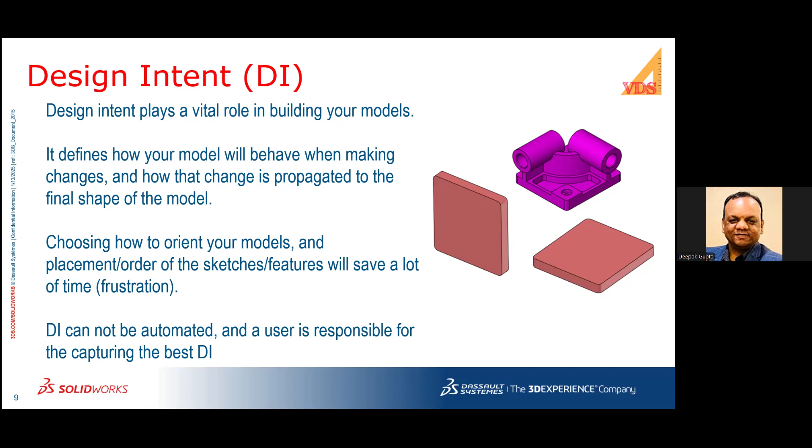And the most important part is that design intent cannot be automated, and a user needs to capture the best design intent based on what he or she is going to model, or what the question is asking them to model.

Okay, now we are going into the exam topics.

The first topic is global variables and equations. Global variables or equations will be the main ingredient when you want to do segment one. The best part about global variables or equations is that you can create the global variables on the fly or using the equation editor.

So let's look at how we can create the global variables on the fly, or how we can use the equation editor. We'll look at one example of each.

Is the SolidWorks screen visible? Yes sir, yes sir, visible.

Okay great. So in the exam, you will be asked to create certain global variables and link your dimensions to those global variables. And then throughout that particular segment, you will be asked to change the values of those global variables so that your model is going to change.

And then you will be asked to get the mass properties, or pick one of the values from the mass property. So I've created this base plate and double clicked on it so that I can see the dimensions. Right now you can see there's nothing assigned to these equations.

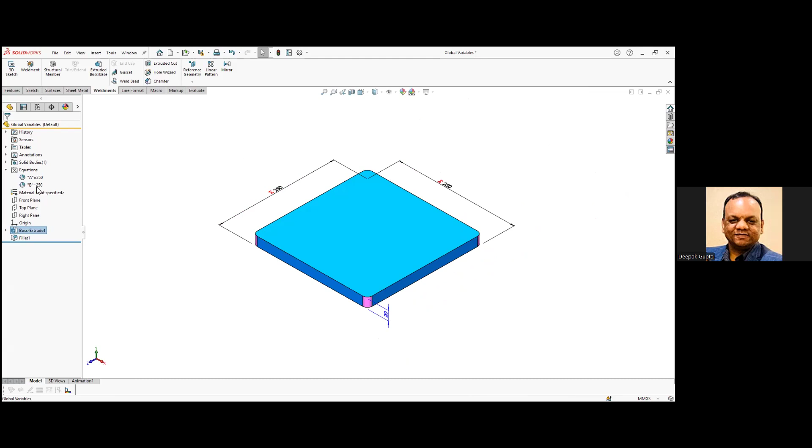So for that, you have to always go over here and change it from here. Good to see that it's letting me change it. So I'll save and close this file.

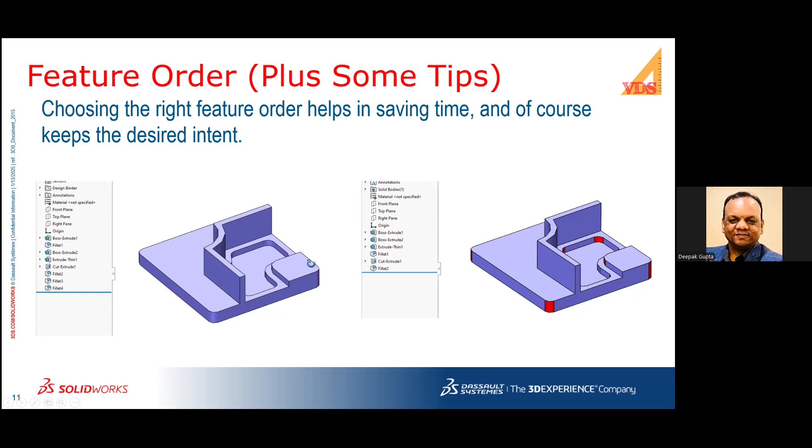Let's look at this file first. So what the user did: created a base file, then added some fillets on the end, then did some extrude and a cut extrude, right? And then the user added the other fillets, which you can see over here. Now, what if this fillet changes?

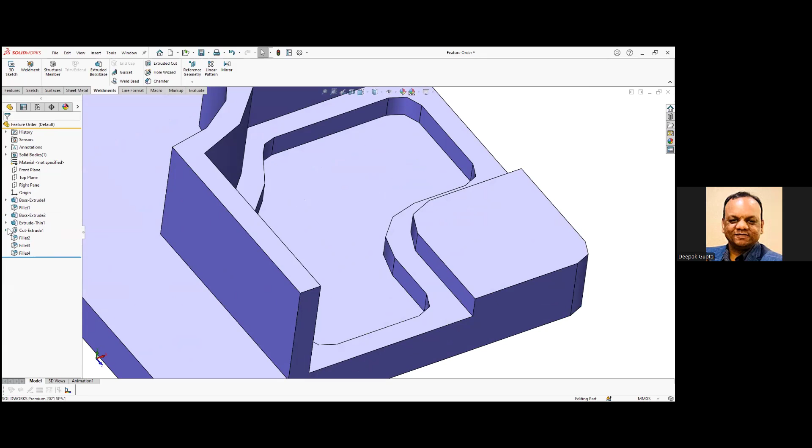Let's look at how this cut extrude has been done. So it's basically an offset from this face, which means whatever fillet will be there, this fillet will be 10 plus whatever is the offset value of that fillet.

But instead of using that design intent, the user created this fillet as a separate tool and separate feature, and this fillet as a separate feature. So if we change it to 12, but because the design intent was not used correctly, this fillet instead of being like 25, it should have been whatever is the offset value.

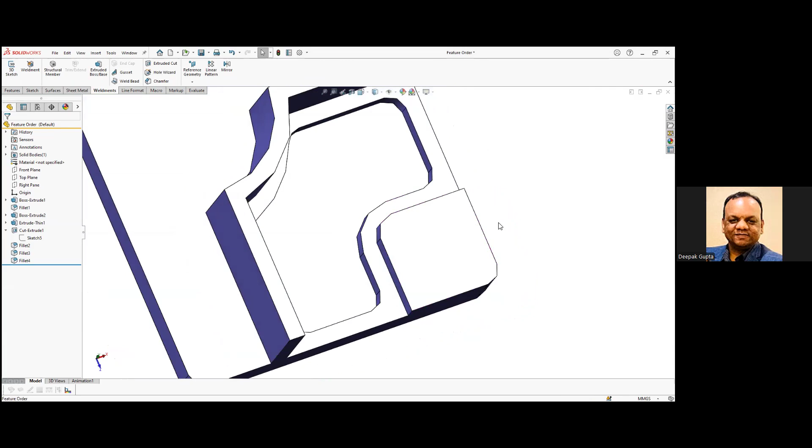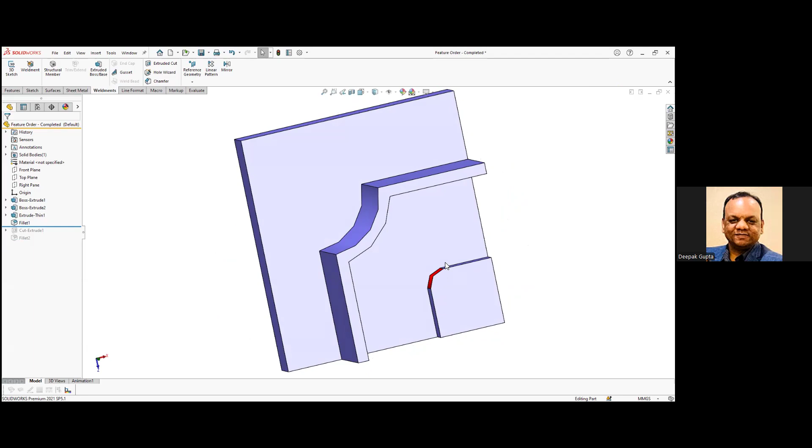Now let's look at the other user's file. What he did was create the same thing like this, and then he knew, because there is a cutout to be made, that cutout is an offset from these edges and this fillet feature as well. So he considered that into the design intent, and this offset was created using that feature in mind.

And if I change this offset to say 15, this fillet will automatically update. And finally, he added the rest of the fillets.

Now I would like to show you a few tips and tricks over here. Let me just roll it up. So we have seen that there was an extrude feature created in this corner. Let's create one more. I'm using the shortcut L for the line key, right? So I'm doing an L, and then I will go to the extrude.

I will not. Oh, right. Hmm.

No, SOLIDWORKS is behaving like this. What happens is when you create a sketch like this - or maybe I should be in sketch mode, sorry, I should be in the sketching mode. So I drew this, and I went to the extrude command. The moment you do this, I'm not sure why it is not running.

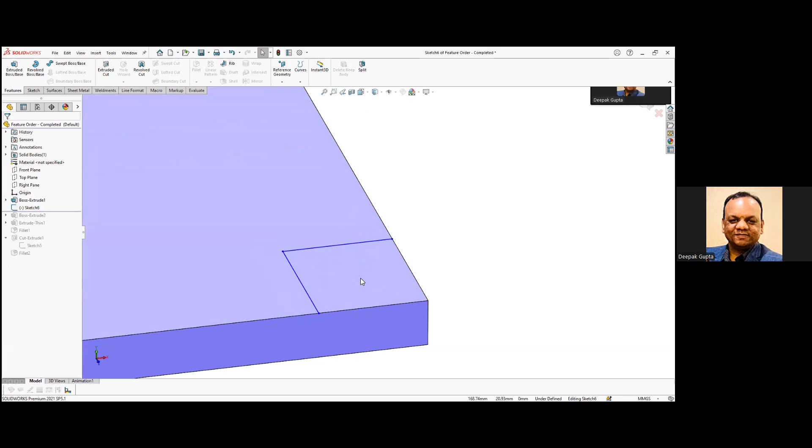Or maybe we can try to give a dimension if that works. Let's try again - no, it's not helping. Sorry, for some reason it's not working, but you can try it on your machine.

What SOLIDWORKS will do is, when you have an open sketch which is coincident with the edges, SOLIDWORKS will prompt you asking should I close the sketch or not. Let me try one more time - no, it's not working. So okay, let's move on to this one then.

The second tip - I will delete this. One of the things I have seen users doing is, when they have to do an offset on a face, what they will do is select all the edges individually. Instead of that, what you can do is simply click on the face.

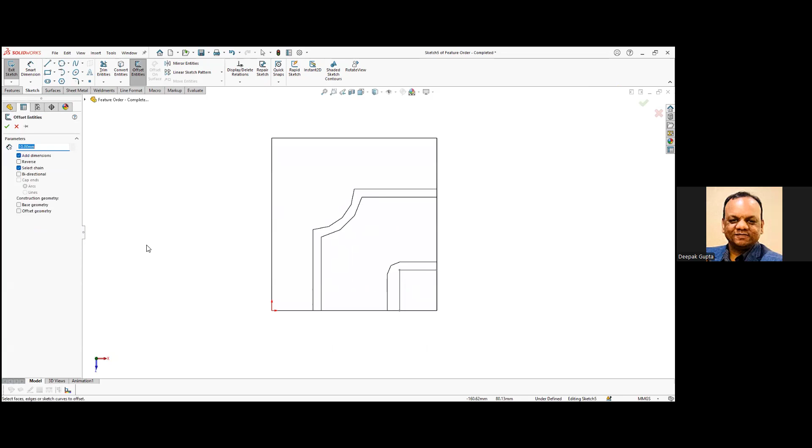SOLIDWORKS will then automatically find all the required edges, and then either you can click inside to get the offset, or you can select the direction from here. So instead of selecting all single edges individually, you can simply click on the face, and that will let SOLIDWORKS find all the required edges on that face.

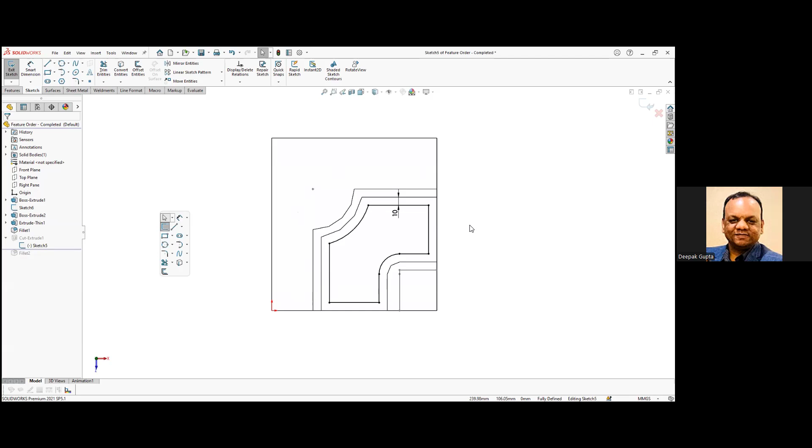And then if you have to do a fillet on several corners - usually I don't recommend sketch fillets, but sometimes you have to use them. So if you have a lot of corners or vertices where you want to add a fillet, just go to the fillet command, enter your fillet value, let's say 5, then cross window like this, and enter.

So instead of individually picking up each corner, you can select all the vertices, or even if you do Control A, it will automatically select all the vertices and add all the desired fillets. So these were two or three tips. This also works - I'm not sure why it is not working here. Let me just try one more time by deleting all of it.

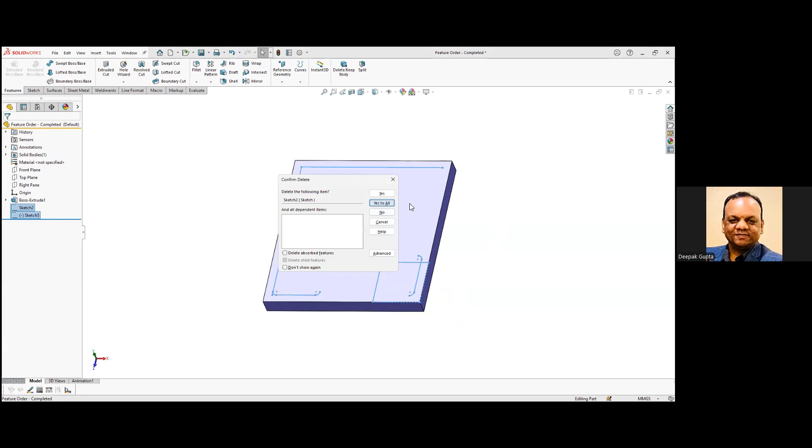Let me just delete all of these sketches and try one more time. So a line, and when I go to the extrude, for some reason it is not working. No, sorry, it's not working. So I would suggest you please try it out yourself.

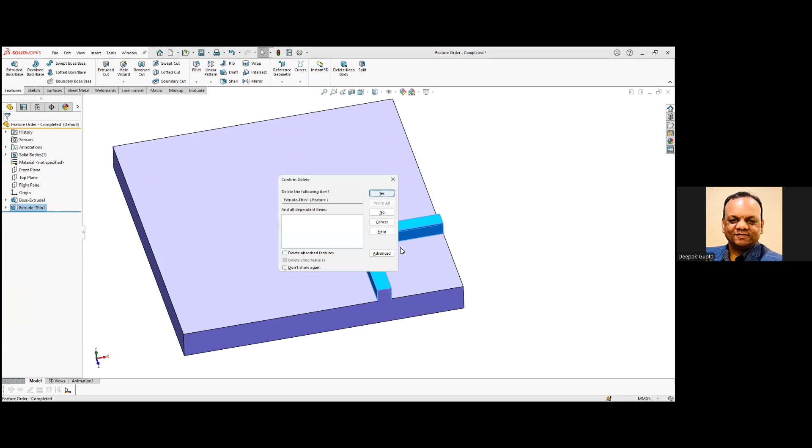When you have a sketch like this, an open sketch, and you try to extrude it, SOLIDWORKS will prompt you if you want the sketch to be closed, or converted into what you'd call a thin feature.

Okay, another fun quiz. So anybody wants to answer, maybe in the chat.

Cheeseburger - yes, cheeseburger, that's correct. Prabhu, you've sent me a message: can we flip the direction? Yes, we can flip the direction, but for some reason I'm not sure why SOLIDWORKS is not prompting to show the direction. I'll try to find it out at the end of the session why it is not working, and then we'll definitely figure out why it was not working.

Okay, offset from surface. Many people - this is specifically regarding one of the questions in the sample exam, but I'm sure it will come up in your daily life as well, or in the actual exam. In the sample exam, you are given a thickness of 5 millimeter for that cut extrude, which is from the bottom face.

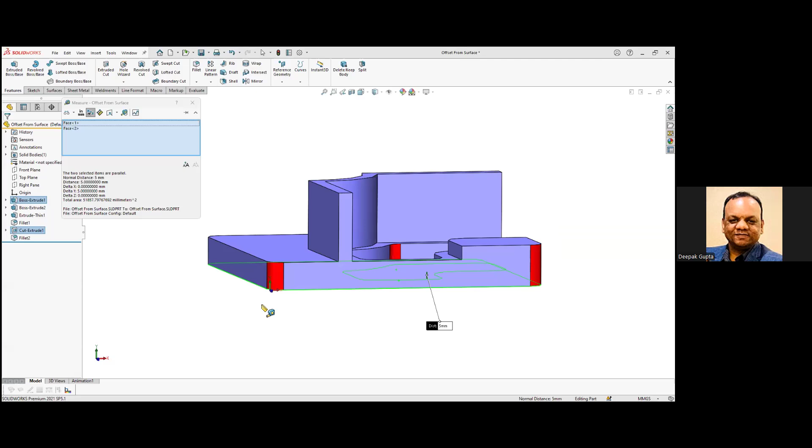This is what they will do - every time there is a change in height, let's increase the height, let's say make it 25. Once you do that, this will get changed, and the user will forget that they did the calculation in a different way, and now they need to increase or decrease the depth of this cut extrude to get the right answer.

Instead of doing that, when you are doing the cut extrude or even boss extrude, instead of using blind, simply use offset from surface, define your offset face, and define the thickness you need. Whatever thickness change you make - so this is now 5 mil, right? And now let's change it back to 20, and let's check this thickness again.

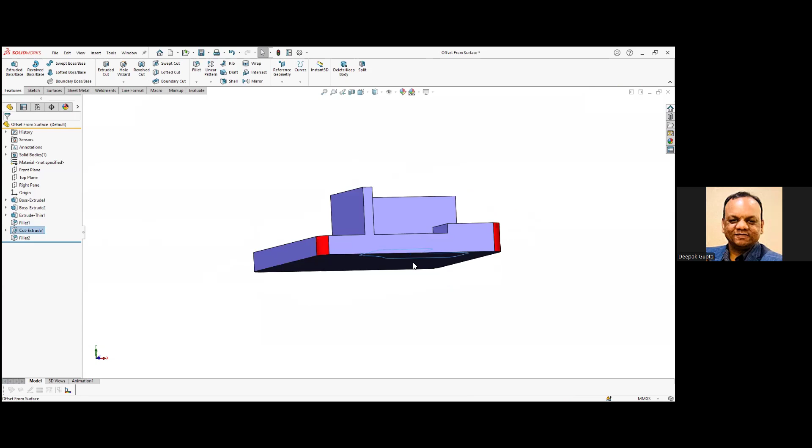So this is again 5 millimeter. You have to make sure that you use the right tool to keep your design intent intact and capture it correctly.

I have seen, like from the last couple of years, that users have messed up some of their questions because they didn't use the right unit, decimal places, or even the material. So you need to make sure that you are reading the questions carefully, because in some of the questions they might change the units, the decimal places, or even the material as well.

Mohammed has sent yes, or maybe I might have this option closed. Yes, Mohammed, this is the right command, or this is the correct prompt. So everyone, I would suggest you look at what Mohammed shared in the chat, where he is showing the option I was talking about.

So when you do a sketch which is coinciding with the edges, you will get a prompt. Maybe I have that prompt off due to some options. So getting back onto the unit, decimals, and materials - make sure that you read the questions carefully. What is the unit system being asked? What are the decimal places? What is the material? And you have to use them effectively to get the right answer. Otherwise you will be wondering why your answer is not matching with one of the options given, or why your question was wrong.

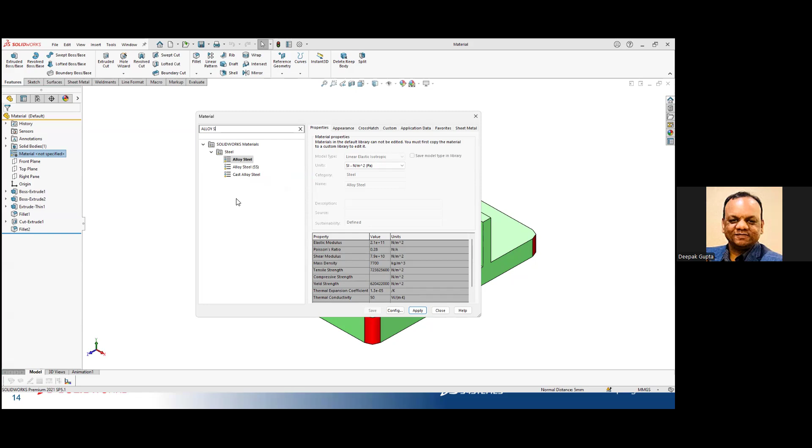So the exam had alloy steel - now with the alloy steel name we have three variants. We have to make sure that we are using the correct density of the material which is given, otherwise your answer may not be correct. Once you have selected the material, you can simply click on apply, and the material will be applied, and you will get the right answer. So use the search for material, and make sure you verify the density given in the exam.

Mass properties - during segment 1, and I think during the other segments also, you will be required to check the mass properties. In the mass properties, you might have to enter center of mass, or maybe the weight or mass of the model. SOLIDWORKS provides you a tool called mass properties itself, where you get all the information you need to answer those questions, or even these are helpful in your daily needs.

As a tip, I would suggest you to assign a keyboard shortcut to both measure and mass properties, so that it makes it easier for you during the exam, and you are not spending time trying to find out where the mass property tool is. So for me, I have assigned M for the measure tool and W as a significance of weight for the mass properties.

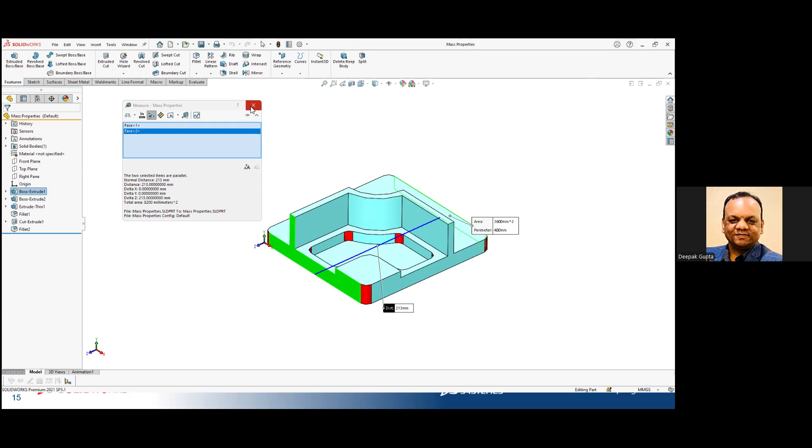So if I press M on my keyboard, I will get the measure tool, and you are seeing this name as mass property because that is the model name, but it will always show your model name over here. That can help you if you want to check something during the exam to make sure that your dimensions are matching. Now I'm pressing W on my keyboard, which gives me the mass property window. Make sure to assign any keyboard shortcut which you feel would be better for you. There is no hard and fast rule that you should use M and W - you can assign any keyboard shortcut to your needs.

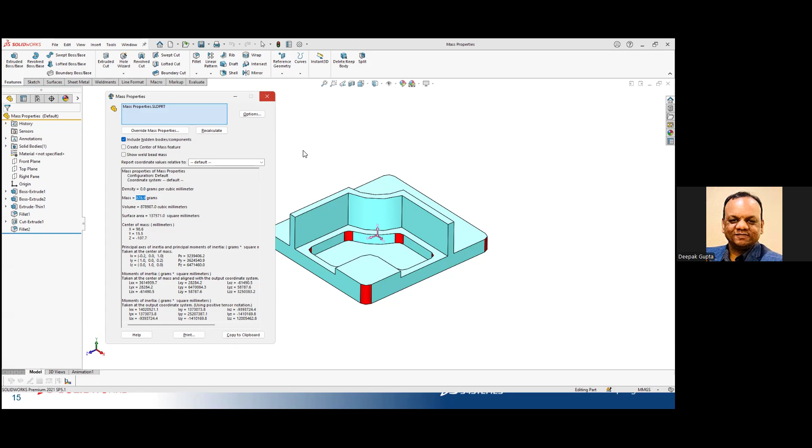And then you will be required to answer the questions, and you can also copy paste. I'll be talking about this again later, but what you can do is always collect the required value, if it is mass properties or the mass of the component, and copy and paste it into the exam. Make sure that when you are giving the answer where you have to enter it, no units are entered into that text box or the answer box, otherwise that answer will get invalidated. So make sure you need to enter only the numericals, and no other annotation or alphabet should be entered into the exam answer box.

Delete face. I would not suggest you use this particular command every time you are in trouble, but this tool will be helpful when you are in ultra trouble, I would say.

During one of the exam questions, you will be given a part, or you will be modeling a part where you will have to modify some things. For example, we have this part with an extrude boss feature on both sides, and the exam may require you to remove it from just one side while keeping the design intent intact.

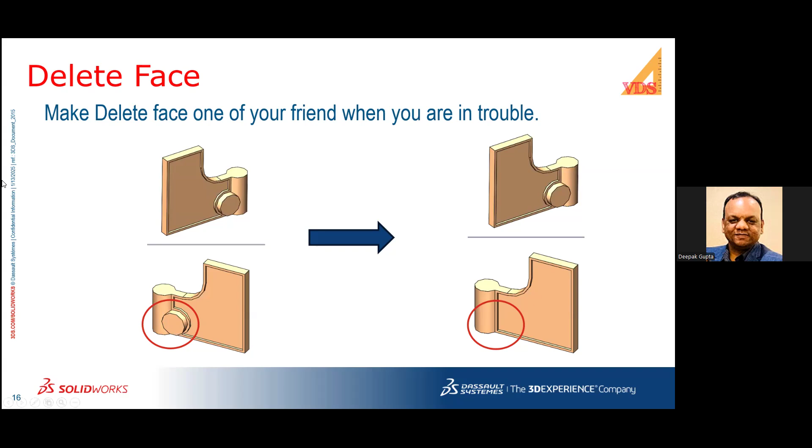Now, the first thing a user will do is edit the feature, remove it from the other side, and then edit this cutout to get to the right answer. But it may not be possible if you are given a part which has an imported body and no history. So this tool, delete face, will be helpful when you want to do it very quickly.

So this is the original file, and you will be required to create something like this and then verify its mass property. Let's see how we can use delete face.

You will find delete face under insert, face, delete face. You can select delete and patch, and not this one.

So did we see the magic? SOLIDWORKS automatically computed the rest of the thing.

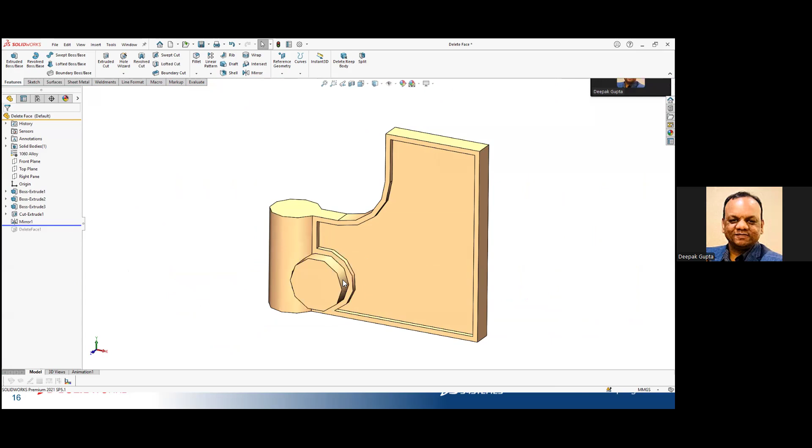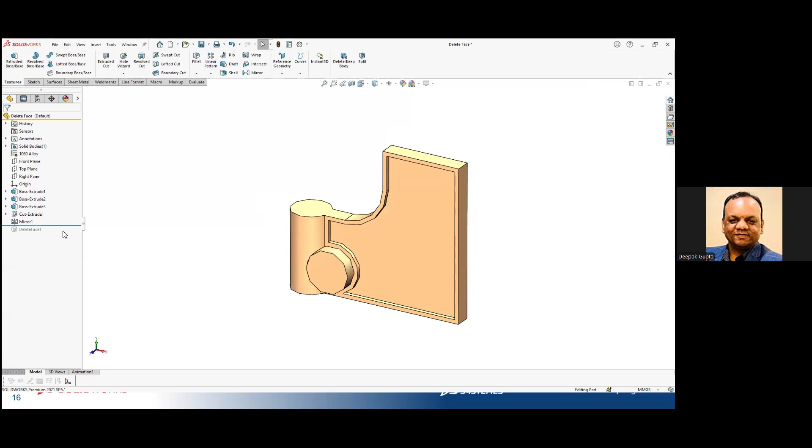Now, if we had to do it the other way, which means you would have to maybe cut extrude this, do a boss revolve or boss extrude for this, and then do a cut extrude to remove all of it, which could have taken a lot of time, and there is a good chance our model may not be correct. So instead, try delete face first, and if that is not helping, then you can look for different methods.

And this is how you get this easily. It didn't take much time, no additional computing was required, and we still kept our design intent because we did not change any values. We just removed the unwanted feature as per the question.

Similar to delete face, we have another friend. Move face is also a friend in need.

Whenever you are in trouble, go to the move face and request it to help you get out of trouble. In one of the questions, you may be required to move a certain hole, or certain face, or certain features. So from this, you may be required to do it like this.

Now, there is a good chance that no feature history is given, or even if feature history is given, there is some design intent that this hole or particular feature is on a center line, meaning no dimensions are given, yet they require you to move it by a certain amount.

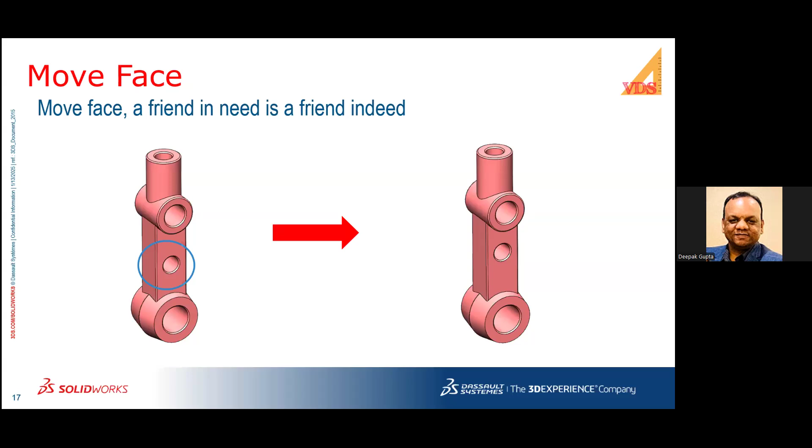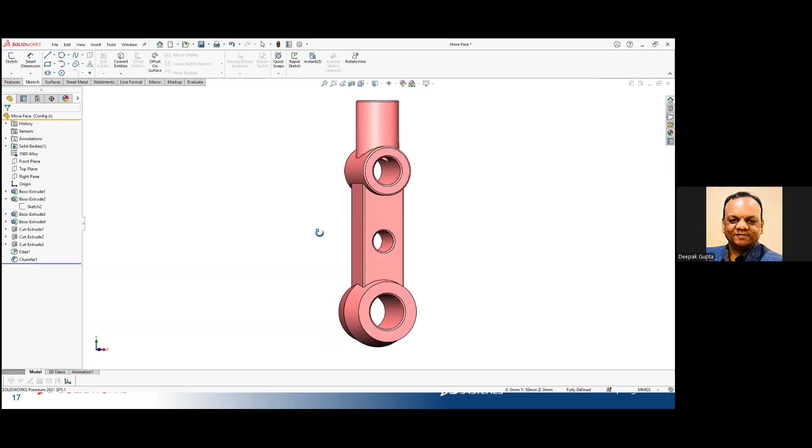So let's see. This is the feature, and if I look at this particular hole, it is on the center line. So if I have to work it out, I'll have to edit this feature, move it up and down as needed, add the required dimensions, and then again work on the chamfer.

Instead of this, we can go to insert, face, move face, and select these three faces. We'll say translate, and let's say we want to move it upwards in the y direction by 10 millimeters.

So we did not change anything. We did not go into the feature editing mode.

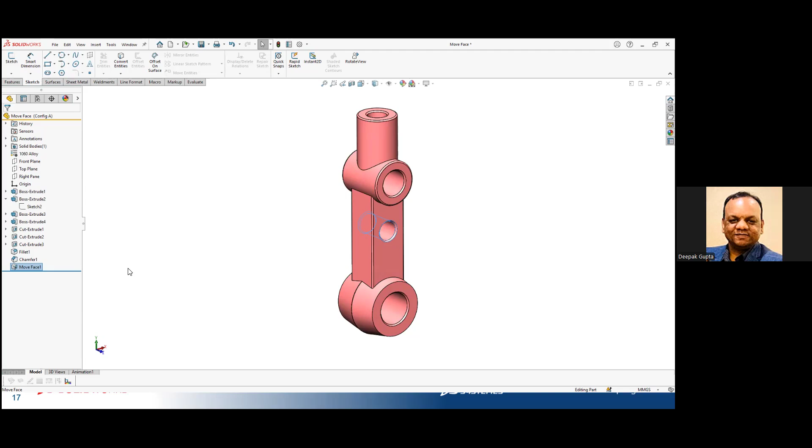Advanced shell - how many of you have used shell commands, or know what the shell command is? Yes, I have used it.

In the SolidWorks shell command, we can hollow out a part or model from the inside, and we can also remove any particular face we want. It adds the given thickness value to the rest of the faces. But in one of the questions, you will be asked to do a more advanced shell, meaning multiple thicknesses in a single feature.

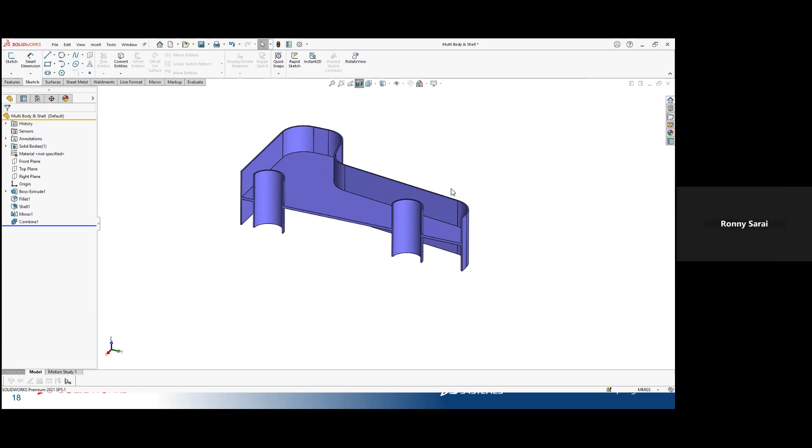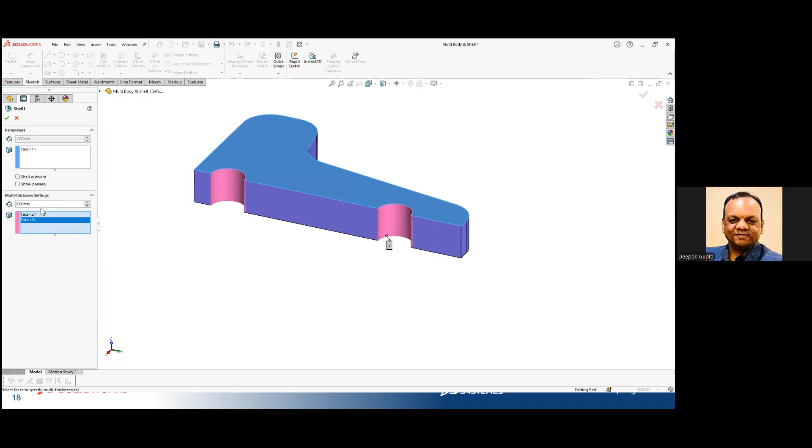You will be given a certain model, and you will be required to change from a continuous thickness to a different thickness. What you need to do is simply edit the shell command. On the upper side, whatever face you select will get this thickness, but on the lower side, you can define multiple thicknesses for different faces. For example, this face 2mm, this face 3mm, and this face 5mm. So we have four different thicknesses in the same model using one feature.

The moment you click OK, the overall thickness is 1mm, this is a 2mm thickness, this is a 3mm thickness, and this is a 5mm thickness. So instead of doing different workarounds, you can use the shell tool itself to create different multi-thicknesses in the same feature and in the same part.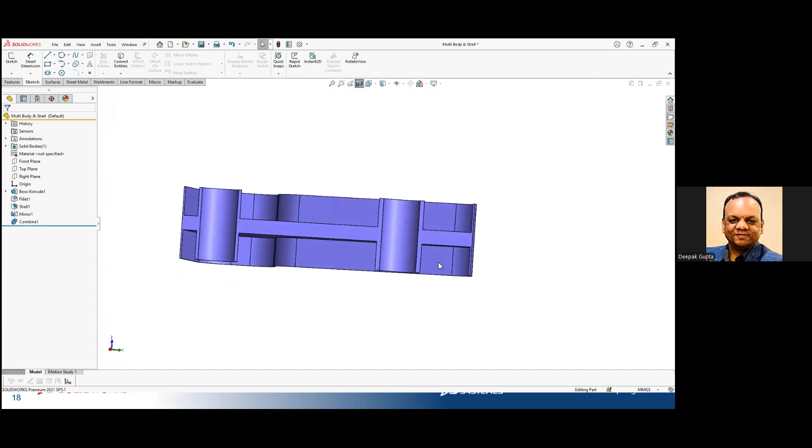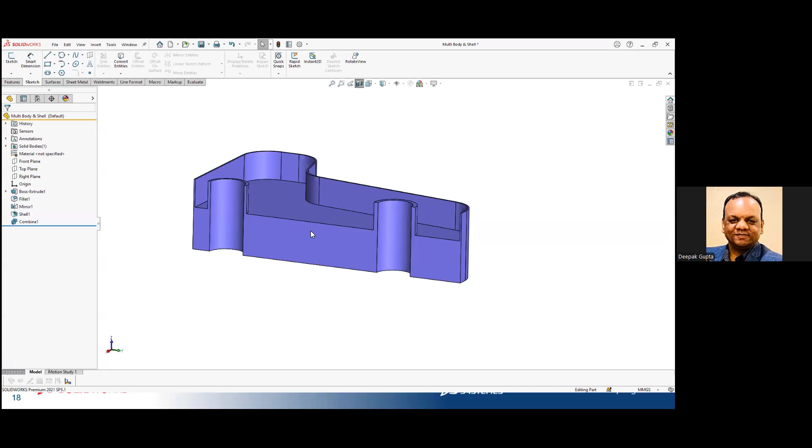Also, in one of the questions, you will be asked to create a part which is shelled on just one side, whereas on the other side no shell is required. What you need to do is simply reorder the shell and mirror commands, and the rest will remain the same to get your required model and answer. This is similar to an exam question where you need to shell on just one of the sides.

We have a rollback bar in the models - unfortunately it is not available in the assembly, only for part models. By rolling back a part, we temporarily suppress the features, and then we can review those features and investigate the model to find out how it was made, and what are the different parent and child relations between features above or below them.

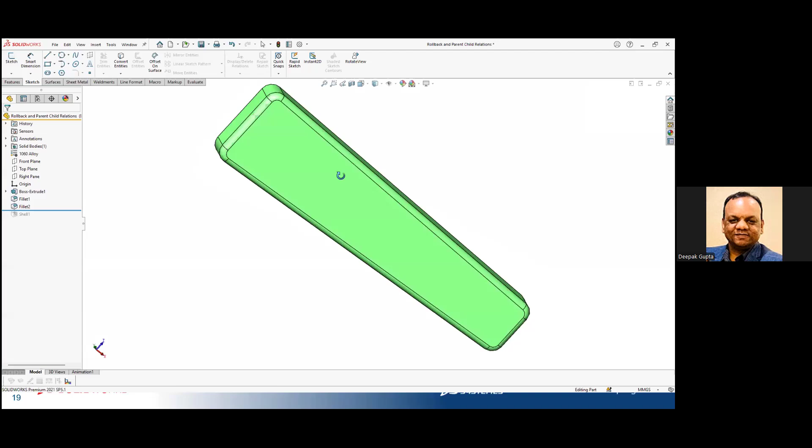Let's look at this particular component where we want to modify it to something like this. Let me open it up. In this one I have a base extrude, so I'll roll it back. I have a base extrude, then a fillet on the four corners, then a fillet at the base, and then I'm doing a shell.

One thing I have seen people do is shell it out first, and then start adding the fillets, which totally invalidates our design intent, because now you have to calculate the fillets on the inner side as well, and that takes a lot of time. So make sure you are using the right design intent and right feature order.

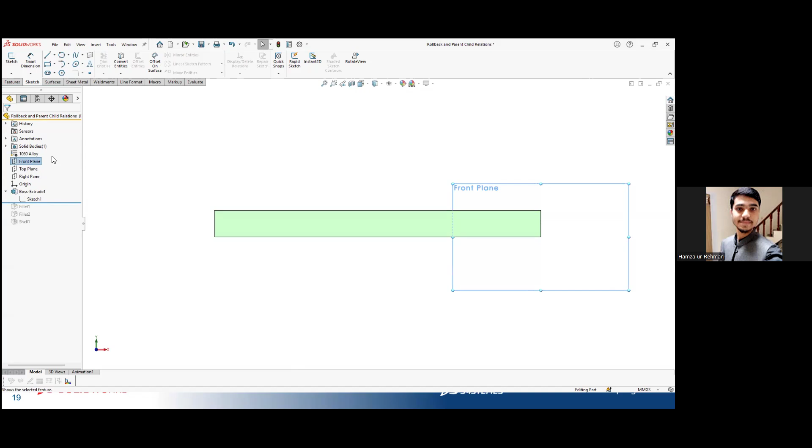Now let's change this part. One thing we can do is modify this sketch itself, adding the cutouts on the end and then adding another feature. But instead, let's make it a little easier. I'll add two sketches, maybe just random sketches - though I am a fan of doing a fully defined sketch, but just to save time, I'm not going to do it.

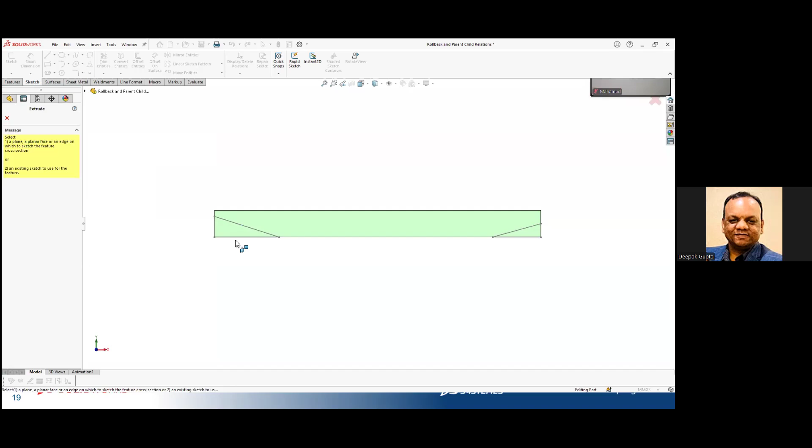So now I'll simply do a cut extrude, select this feature, right click, through both direction, and OK. So this is one of the changes, and then let's make another change on the top. We'll do it again like this.

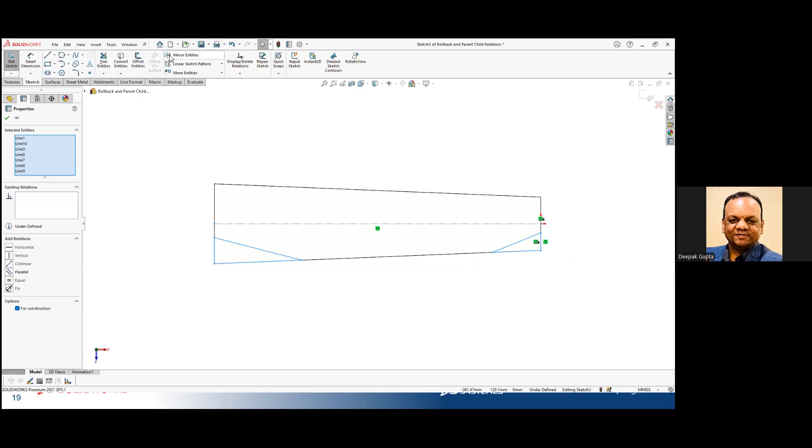So when you have a center line in place and you select the center line along with any of the solid sketches and click on the mirror command, SOLIDWORKS will automatically mirror along that center line. Now there is one more trick here.

Go to the mirror command. If you are in the mirror command, select your entities, and the moment you select them and press right mouse button, SOLIDWORKS will automatically jump to the next option, asking which entity or line you want to mirror about. So instead of taking your mouse to that box, in case you have not pre-selected a center line, you can just right click and SOLIDWORKS will jump onto the next window.

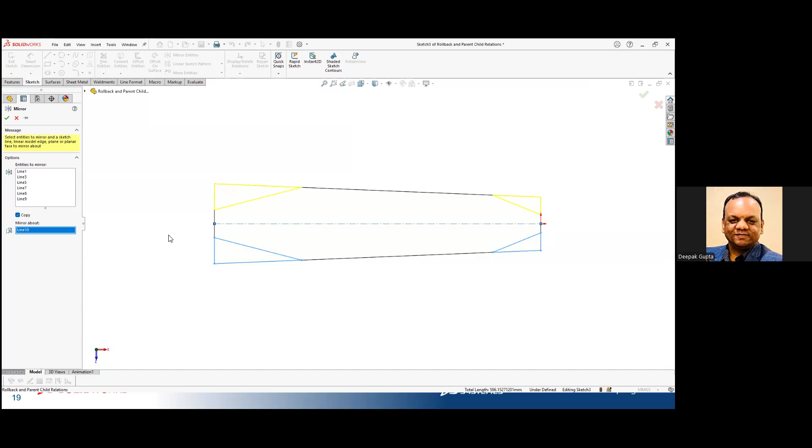This trick is available for many features, you can explore them. Let me show it once more. Look at the cursor, it changes - see how the cursor is acting as an enter button. So I'll click on it and then click OK.

And then we can do the cut extrude again through all and OK. So we have this feature ready. Now let's add the fillets. The fillets will be broken because we removed all the edges, so let's clear them all.

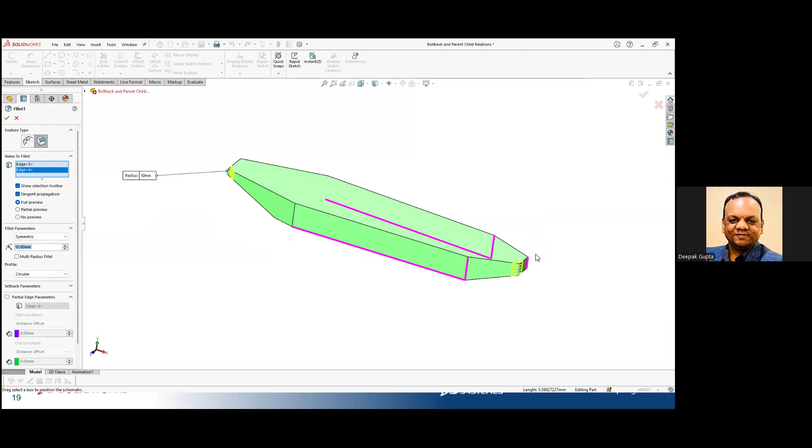I have the selection toolbar set to on. If you have it on, you can click on the edge and SOLIDWORKS will prompt you for whatever edges you want to select. So we'll select the desired edges, click OK. We'll do the same thing for fillet 2.

Instead of this edge, we can simply select these 3 faces. So we have the major design changes done. Instead of doing a lot of complication in the base sketch itself, we added 2 more features to get to the desired result and model.

Sorry, one thing I forgot to show you - the dynamic references. Let me go back to the model. If you have these 2 enabled in your model, this is available for assembly as well as for models. You can select both of them. And if you go to any feature or any sketch, it will show you what are its parent features and what are its child features.

We call it a parent-child relationship. Using that, it can dynamically let you know that this particular feature is dependent on which features or which particular reference geometries. So you can easily find it out.

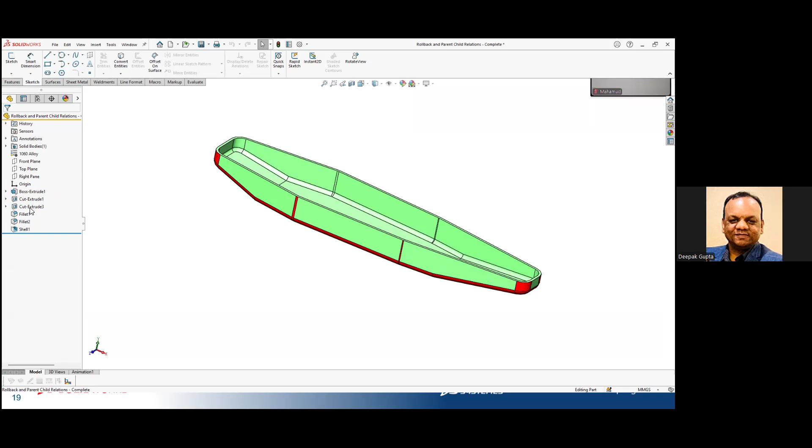Or another option is, in case you are using an older version where this option is not available, you can right click and go to parent-child, and it will list all the parent-child relationships in the prompt window. So you can see that for the cut extrude, sketch 3 and boss extrude 1 is the parent, while fillet 1 and fillet 2 are its children - which means if I delete this feature, SOLIDWORKS will ask me whether it should delete the child as well.

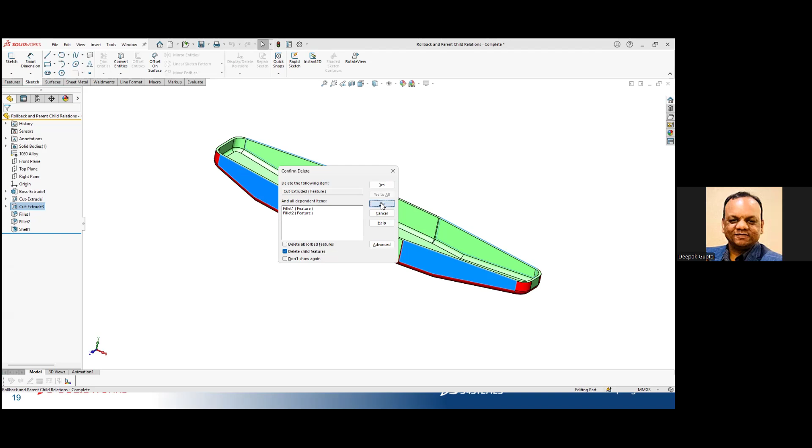So during the exam, if you are required to find the parent and child relation, you can use these tools. And even while working on your projects, you can use these tools if you have to frequently find out the parent-child relationships.

So how many of you have used configuration? Yes. Okay, great.

In segment 2, you will be given a model and asked to create a configuration from one or two of the given configurations. In that, certain features you will have to disable, move, or add. If you look at the 3 configurations in the picture, on the left we have configuration A, then configuration B, and then configuration C. There are some features common in A and C, and some common in B and C. And we also see a feature which is in A, but in C has been moved to a different location.

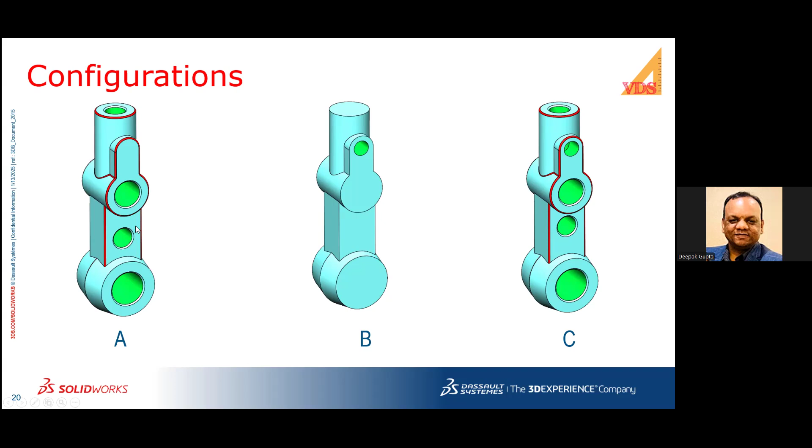So what we can do is understand how configurations work and what the main things are we need to look at when creating a configuration. I'm in configuration A, and I want to create a new configuration.

We create configurations in two ways. One is a direct configuration, which we can call a parent configuration. We also can create a derived configuration, which needs a parent configuration and will be linked to it, so whatever changes you make in the parent configuration will be reflected in the derived configuration.

Second, whatever configuration is active in the model, if you add a new configuration, SolidWorks will assign the same features to that new configuration. So let's add one more configuration. To do that, I just right click onto the configuration and say add configuration.

Now, one thing you need to look at when creating a configuration is that you need to make sure you select this option, suppress features. What this option does is, when you create a new feature in this particular configuration, it will be suppressed for the rest of the configurations, unless you tell SolidWorks not to suppress this feature for this particular configuration.

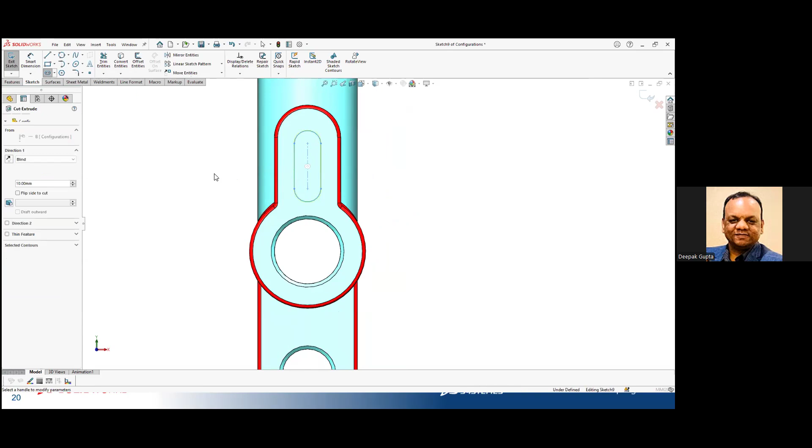So I'll assign it a name, D, and click OK. Now let's create one quick feature here, maybe just an extrude tool and a slot, and I'll say through all and OK. So we have this feature enabled.

Because we selected that suppress feature option, this particular feature will not be available in any of the other configurations. Now, how do we tell SolidWorks to have this feature enabled in another configuration?

The simple method is to right click onto the feature and select configure feature, and you'll be given this table. Let's say we want to unsuppress it for config B. I'll select it and say OK. Now if we go to configuration B, let's unsuppress this, so this slot will be available.

This is something you will be required to do during the exam, and then find out what the mass properties are by adding or removing certain features of the part. So what are the changes in the mass property for that particular configuration, or you may be asked how many configurations exist in a given model, or you may need to create an additional configuration with some features suppressed in a particular configuration but available in its parent configuration.

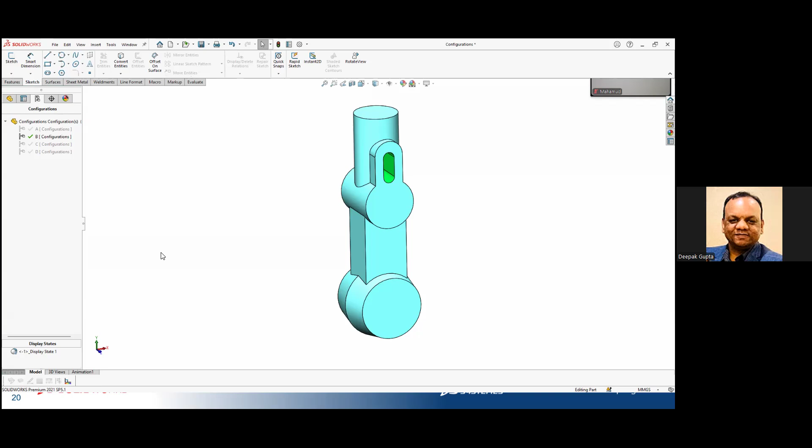Coordinate system. A coordinate system defines our X, Y, and Z directions of how our model is positioned in space.

Oh sorry, okay, let me open up this one then. I'm not sure why, so I'll delete this.

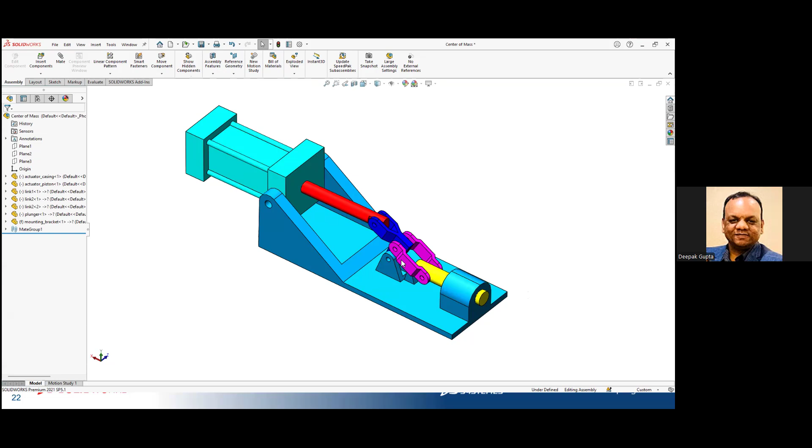You will be required during the exam to create a particular coordinate system at a particular point. Make sure when you are defining your new coordinate system, you are using the correct direction as per the exam. So I'll go to reference geometry, coordinate system, and let's select this as an origin point, and this as my... oh, sorry.

So I simply clicked OK, and it created the coordinate system in the same way as the global coordinate system. But during the exam, you may be required to change the direction. So how would we do that?

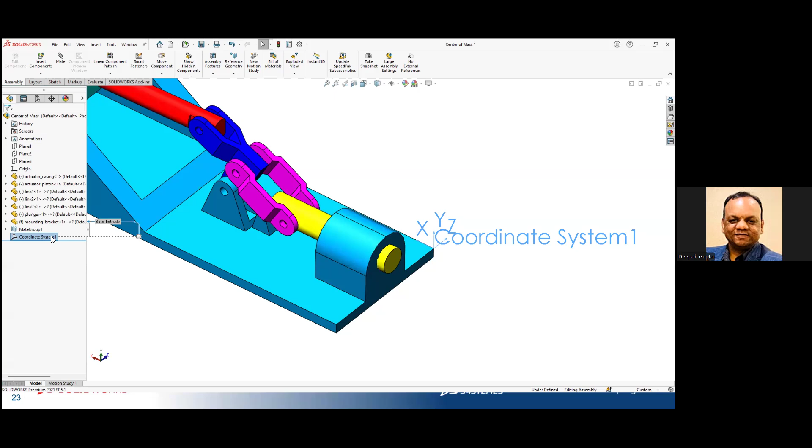So we define the vertex. Now let's say for X, I want this direction, and for Y, I want this direction. You simply need to select two directions only. And if you need to rotate the axis, you can just click on the arrow direction, go to that box, and change it.

Make sure when you create your coordinate system during the exam, you match the axes with respect to what is given in the exam.

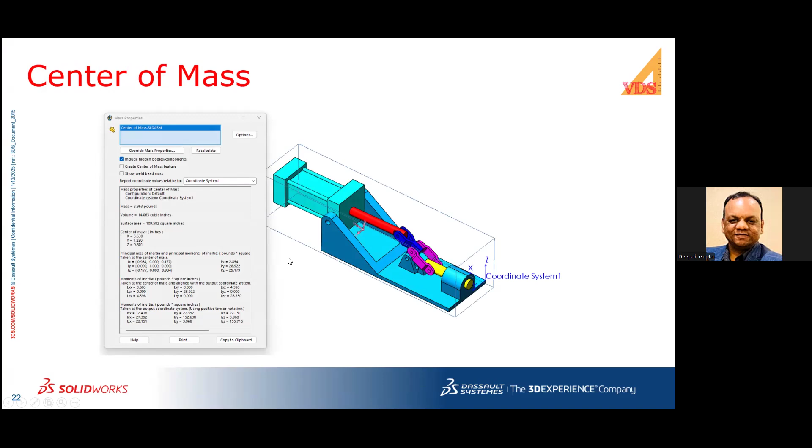Now, center of mass. Now that we have created the coordinate system, the next step would be to measure the center of mass for that particular model. It could be a part or an assembly, with respect to that coordinate system.

So does anyone remember which keyboard shortcut we used for mass properties? W, correct, we used W. So let's press W, and when we press W, we get the mass property window.

By default, SolidWorks will report coordinate values related to the default system, which is this origin point or this direction. But since we created a new coordinate system, you will be required to use that. Make sure, because a lot of people miss this particular step, that they do not select the correct coordinate system to get the right answer.

So let's see what difference it makes. You can see the center of mass changes when we move from default to our new coordinate system. So make sure you are not missing this point and you are selecting the correct coordinate system as requested by the exam.

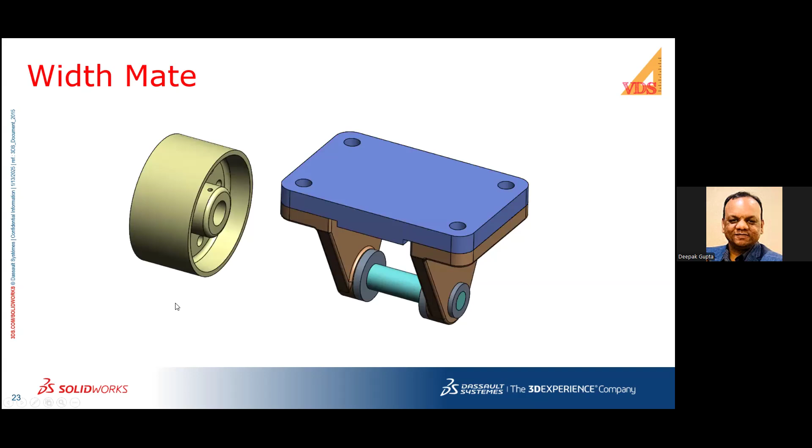So if you have to assign like three mates, you can choose any order, but make sure you are using the right mate tools to define your parts. Now I want to put this wheel onto this axle, but I also want to ensure it is centered with respect to the rest of the assembly. What I have seen people doing is they measure this dimension first, then they measure this other one. Both are 40, so we'll say okay, let's simply add, or let's do one trick over here.

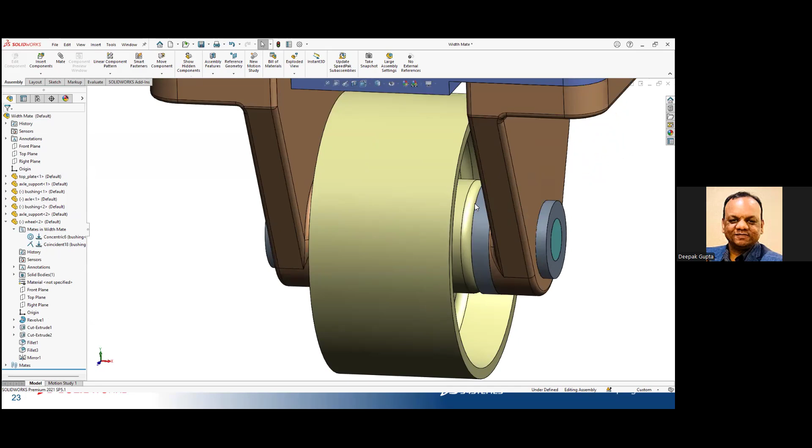You can select an edge, and with the Alt key, when you select an edge and drag it onto a circular entity, it assigns two mates at the same time. One is the coincident mate and the second is the concentric mate. So these are the two mates which have been added. What people often do instead is use a coincident mate or maybe a distance mate to a certain face. But that is not the correct method or the correct design intent, because if in the future this overall geometry changes to a different length, your wheel will be stuck to one particular side.

So we have two different options to tackle this. One is called width mate and the second is called symmetry. Depending on your model requirements, structure and shape, you can use one of these tools. Let's look at both of them.

First I will simply assign the concentric mate, again using the Alt method. Now the wheel is concentric with this axle, but it is still free to move.

Now let's select these two tabs, press Control, and the moment you select four faces, SolidWorks will understand that you want to apply a width mate. Select the width mate and click OK. Now if we change the size of this part, this wheel will remain centered in this particular assembly, because we have assigned it to remain in the center.

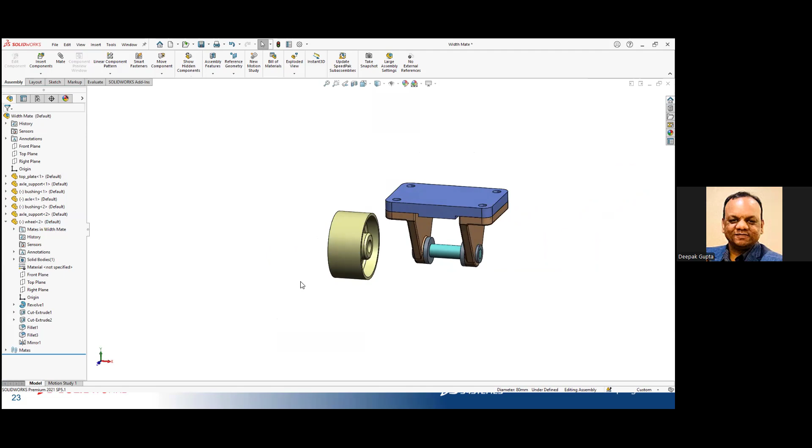Now there is one more method of doing it. It depends on how your model is shaped. Because our model is symmetrical, we can use this method. Let's use the front plane. Make sure to select the plane or face which you want to keep as symmetrical. I've selected the front plane, pressing the Control key, this face and this face, and SolidWorks will understand you want to do a symmetrical mate.

So we will get the same response or behavior as we got with the width mate. You have to choose which of these mates, either the width mate or the symmetrical mate, defines the best design intent based on your model shape and geometrical needs.

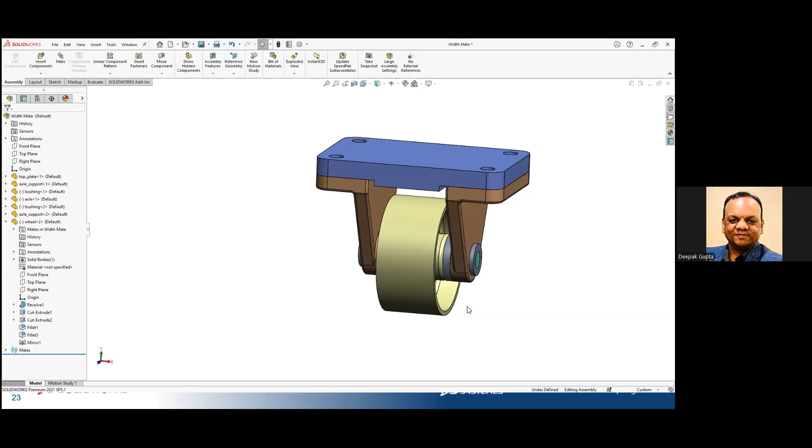Gear mate. This is again one of the advanced mates where you will be given a set of models and required to do a mate either in a 1:1 ratio or a different ratio, and then move your component to a certain degree to find the rotation angle. Right now this is free to move while this is fixed. Make sure that unless you apply the mate during the exam, you do not rotate or move the components, otherwise you will not get the correct answer.

So I will select these two holes, and because SolidWorks is not able to understand if you want to do an advanced mate, based on your selection it is just giving you different options. So let's go to the mate command, go to the mechanical mates, and select the gear. Now since these two shafts or holes are the same, SolidWorks is assigning them a 1:1 ratio.

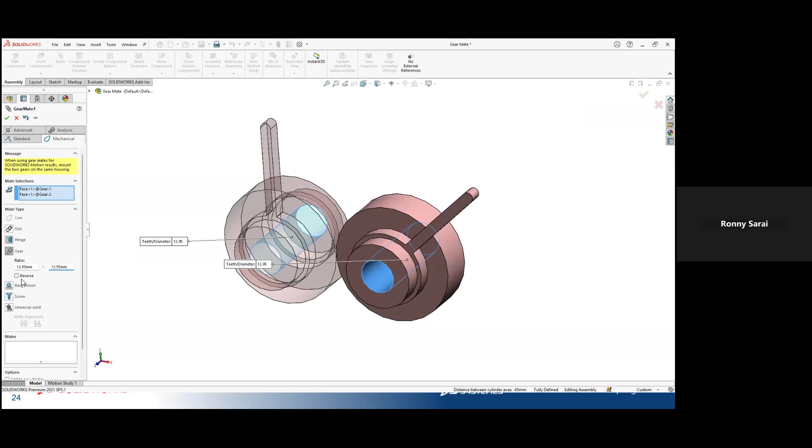Let's keep it the same, or you can do a 2 ratio, and you can define the direction based on the exam question, like whether it wants to rotate clockwise or anti-clockwise.

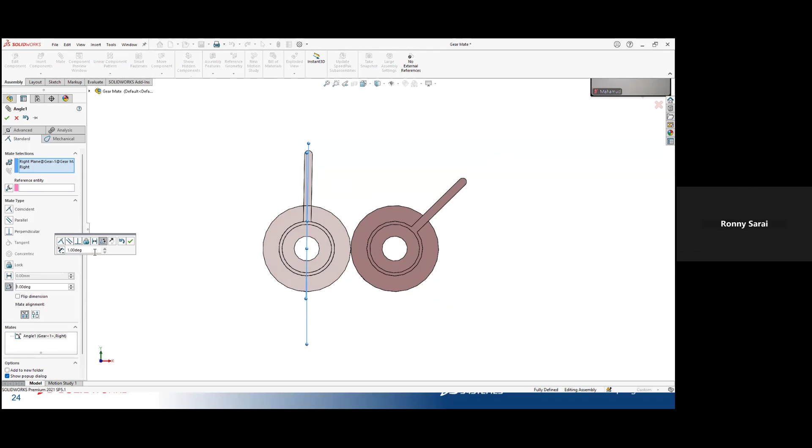Now let's check the mates for this one. This would require you to rotate it by 45 degrees or maybe a certain degree. So let's edit this mate, change it to angle dimension, and let's move it by 15 degree.

Then you will be required to check the angle of the second component with respect to a certain plane. So I used again the M key to find what is the angle. Sometimes SOLIDWORKS gives you a completely different angle, so make sure what you do is you can either draw a sketch in the assembly.

Let's do a quick sketch over here. So I'll convert this one. Now I'll give this angle value. So you can find the angle like this, or if you are not comfortable doing a sketch in the assembly, you can just draw a quick drawing, and there you can find out the desired angle just to make sure that whatever value you are selecting is correct.

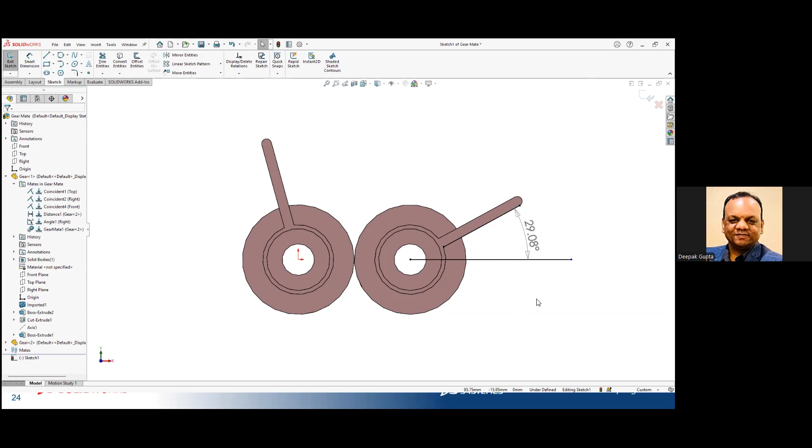Because sometimes when we are checking this exam and we have selected a wrong face, SOLIDWORKS may give you a completely different angle, which is like 90 minus the desired angle or 180 minus the desired angle. So make sure you are using a sketch method or the drawing method to verify your answer before attempting that question.

Path mate. So again, while you are building the models, you will be given a particular file which has the path, and you will be required to do a path mate and make some changes to that path mate to get the desired answer.

So let's do a path mate. I'll go to the mate command, go to the advanced mate, and select the path mate. First I need to define a vertex, basically a point. It can be a vertex, it could be a sketch point, it could even be the origin to define as my starting point or my vertex point.

So I'm selecting the origin of this particular component, and then for the path I'm selecting this spline as my path. Now when you do path, you can also do a selection manager. If you do not have a spline but you have closed or connected entities, you can select them using the selection manager, and it will bring up the options to select one by one, or select in the chain, or select all of them.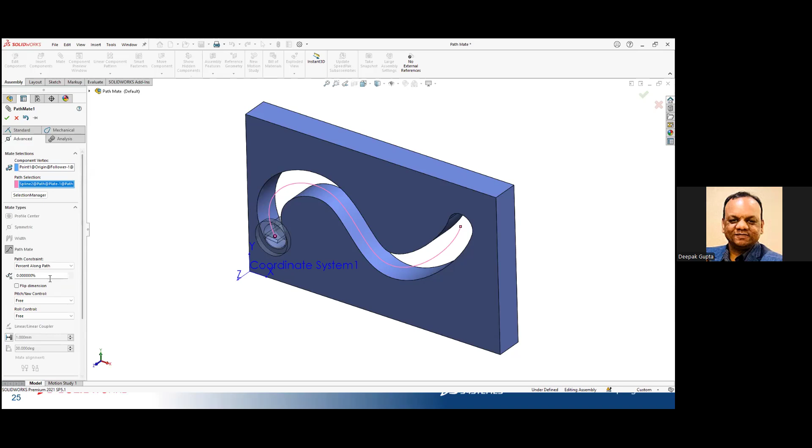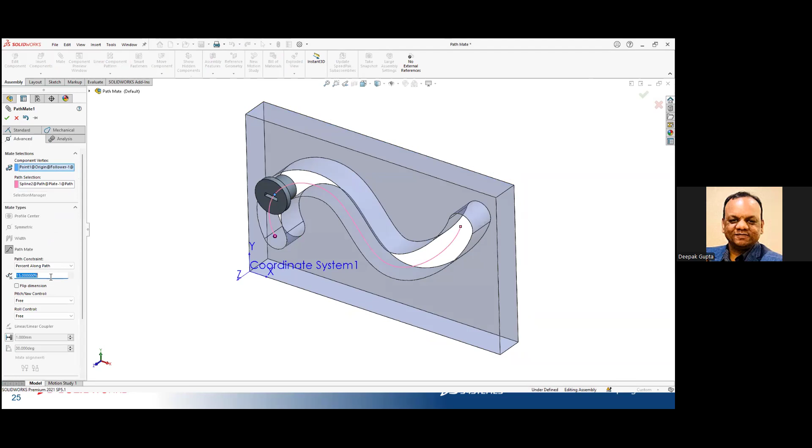Let's select percentage along path, and I'll define it as 15 as a start. Now then we'll press W to get our com value, which is this one. Then in the next question, you may be asked to change this path from say 15% to 47.5, and again check the mass properties and fill in the answer. So you have to make sure of two things: that you have defined the path mate correctly, and when you are doing the coordinate system, checking the center of mass, you have selected the correct coordinate system.

Interference detection - this is similar to collision detection. Collision detection is when we move components in an assembly, and if they are interfering, there is a tool in SOLIDWORKS that says stop at the collision, or collision detection, and the moment two parts collide with each other, meaning they touch each other, SOLIDWORKS will prompt you and stop moving the parts.

Then there is interference detection, which is a slightly advanced version of collision detection. So when your parts are moving within a certain range, and if there's an interference, you can use this tool to find out where the interference is in the model and how much that interference is. Based on that output, you can decide what is the next step to remove that interference.

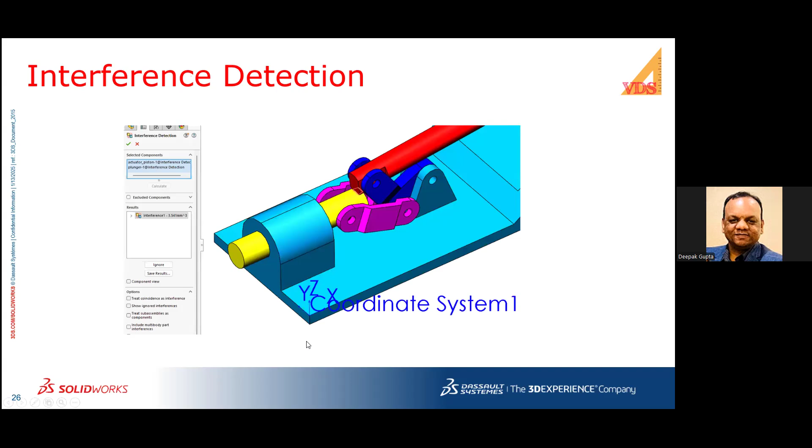So let's look at this model. Right now we see that the part is fixed, and we do not see any interference, and there could be some mates which you may be required to do, say change from 15 to 10, and then do interference check. For interference check, I have assigned a shortcut of Q.

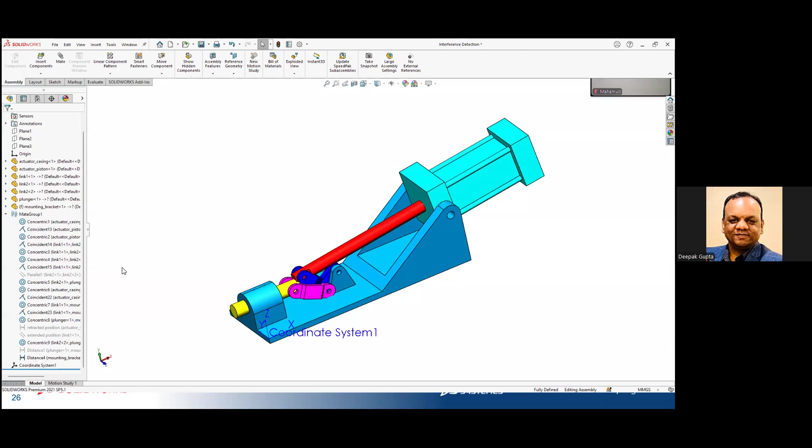Interference detection is also available for multi-body parts, which means if you have a part with multiple bodies, you can also do the interference check in that part model. In older versions, it was only accessible for assemblies, but in some of the latest versions, it's now made accessible to parts as well.

So you select, and you can do basically two types of interference detection when you are into the model. You can check the interference for the complete model. So let's do that first, and it will list you all the interference it finds in that particular model.

You may be required to find interference in particular two components. If that is the case, instead of running the interference detection for the complete assembly or model, just select the desired components and do the calculation. It will give you the value of how much interference there is and which components are interfering, and then you can enter that value into your answer.

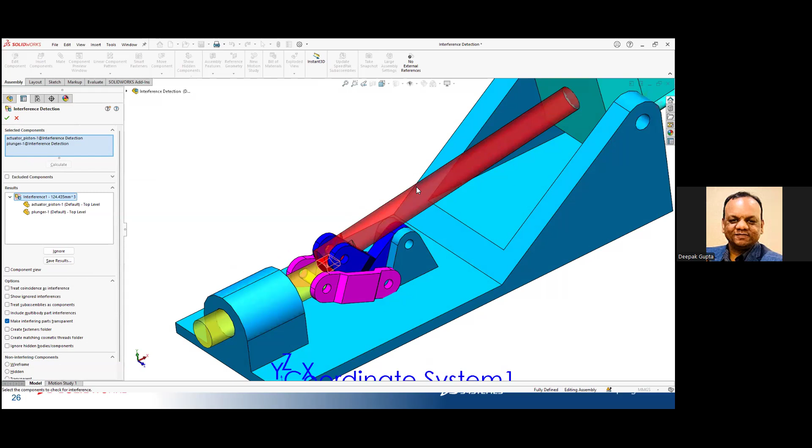Now second, we were talking about collision detection. Though you may not be asked to do any collision detection during the exam, let's look at it.

For that, we have the option called move component, and in move component, we have collision detection. Then we can select all of the components, or we can use a particular component, and we can tell SOLIDWORKS to stop at collision.

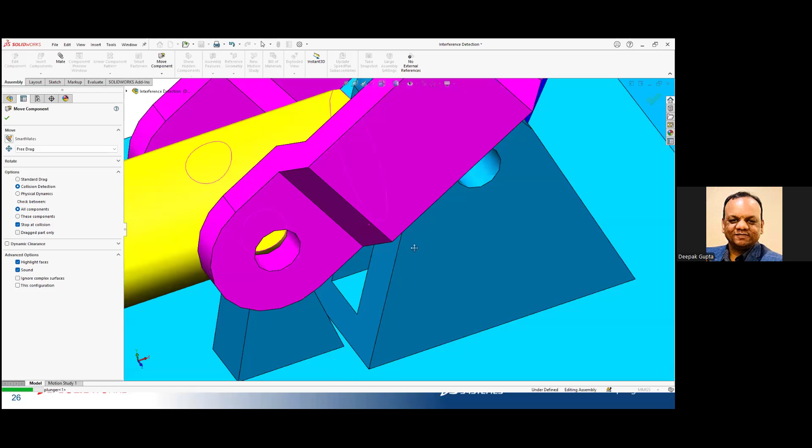Did you hear the sound it made when we were doing the part movements? There were certain parts which collided. Maybe these two parts collided, or they were about to collide, or maybe this particular component collided. Let's try it again.

It will highlight those particular components. So we can see that the shaft is colliding, right? And there are some other collisions as well. Maybe this one is colliding inside somewhere.

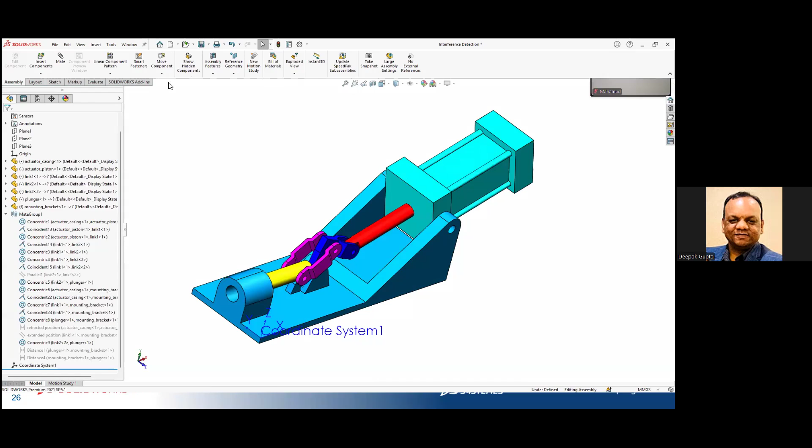Using these tools, it's not only for linear components. If there are rotary components, you can use the same tool called rotate component, which gives you the same option where you can rotate your assemblies. If you have rotary assemblies, you can rotate them using free drag, or about an entity, or by providing a value to rotate or move this particular component or assembly in the x-axis by a certain amount. So you can do that as well, and you'll get the same answers.

Override mass properties. You will be requested during the exam to change the mass properties. That could be the mass of a particular part or an assembly, or its center of mass, and then you provide the answer for what the overall change is in the main assembly.

So I'm using the same assembly again, and let's override. But before that, let's see the mass property for this assembly using our coordinate system. So it is 5.5, 1.25, and let's say 0.8. Now let's go into this part. I'll again use the W key.

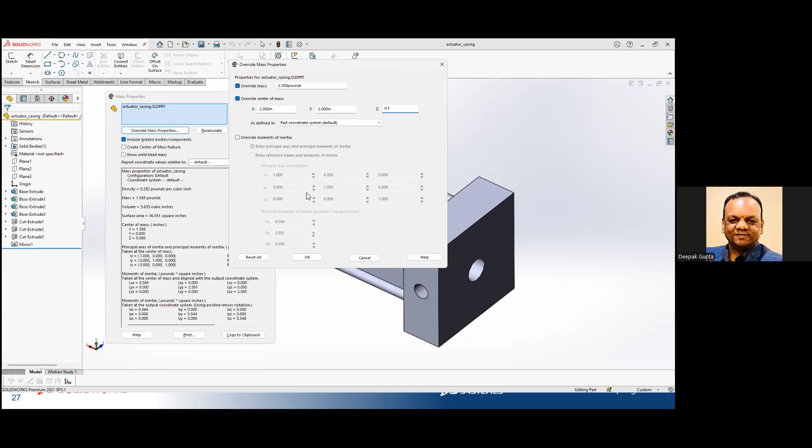Now let's close it, save it and close it. Now let's see. So you can see our center of mass has changed from 5.8, I think it was 5.8, and 1.25, and 0.8 to 6.3, 0.99, and 1.946.

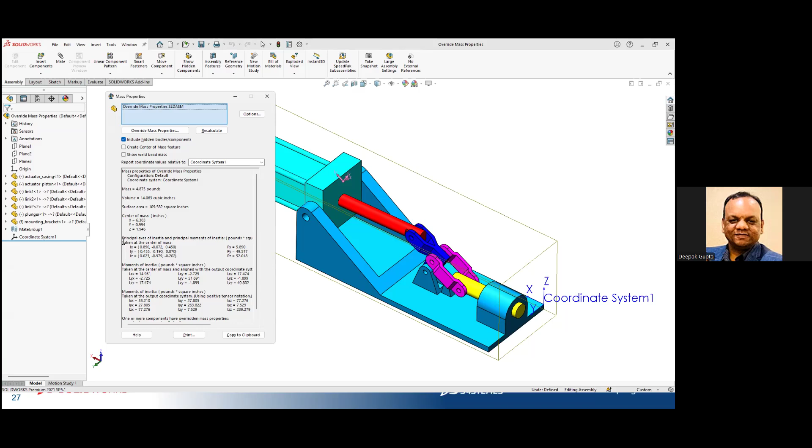So make sure you know which particular component you need to do the mass changes for, and based on that, your answer will change. And like I've been stating earlier, also make sure to use the correct coordinate system.

The replace component feature lets us swap an existing component with a new one if there's a change, or if a particular component is now obsolete and a new part has been made to replace it. So instead of creating the complete component or assembly from scratch, we simply swap the parts.

It's simply like if you have a car and the tire is worn out, so you take out the worn out tire from the car and replace it with a new one. Instead of building the complete car from scratch, you are simply replacing the worn out component.

So basically, we will be replacing a smaller crank assembly with a bigger crank assembly. Let me open up that assembly as well. This is my original assembly, and I want to replace it with this particular assembly.

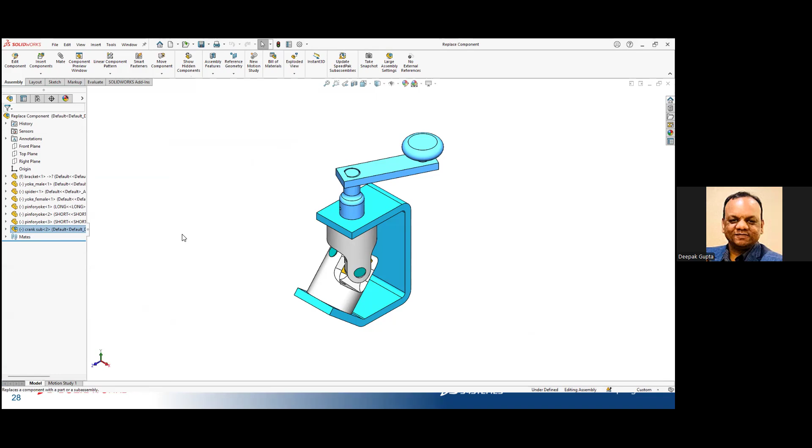Now when you open the replace component manager, SOLIDWORKS will show up all the open components in the backend, and you can select which particular component you want to swap it with.

It also gives you the option - earlier it used to replace all the instances. So for example, if you have 10 instances and you just want to replace 2 of them, you can select all the replaces, and then either select all the instances or select the particular instances. For the mates, it will automatically match the name, or you can manually select them, and then it will reattach the mates.

So if we click OK, it has automatically selected all the mates, and then we click OK again. We will be required to do a center of mass update after this component has been changed, since there will be a change in the center of mass or even in the complete assembly mass, because these particular parts are longer than what was there earlier.

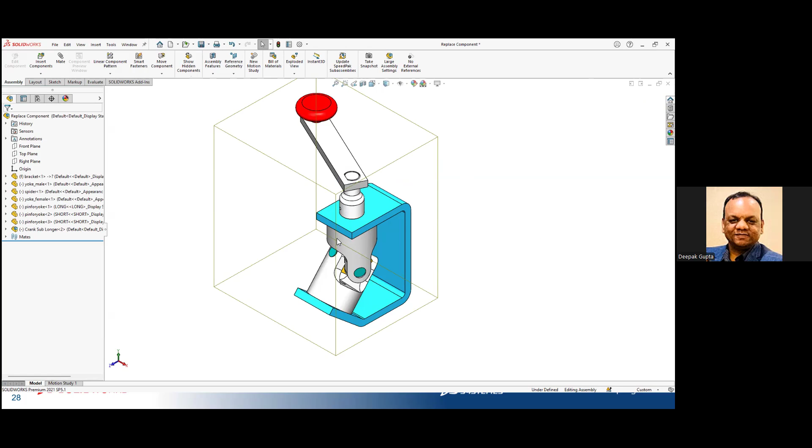So like I said, you will get two types of questions, mainly, for all segments. One will be where you have to enter an answer, which you can simply copy and paste if it is from mass properties or from center of mass, depending on how you want to answer that question. The second type will be multiple-choice questions, where you have 4 or more options given and you have to select the right answer. In the multiple choice questions, there might be questions where you have to select more than one answer. So it is through the exam that you will see these types of questions.

Some of the multiple choice questions will be in accordance with the previous questions, like a follow-up where you have to modify certain dimensions from the previous question to get to the answer. Make sure your answer is within plus minus 0.5% of one of the given answers. If it's not matching with one of the answers, there's a possibility your answer is not correct, so verify your model again and correct if needed, and also check the previous answer which you have been following along.

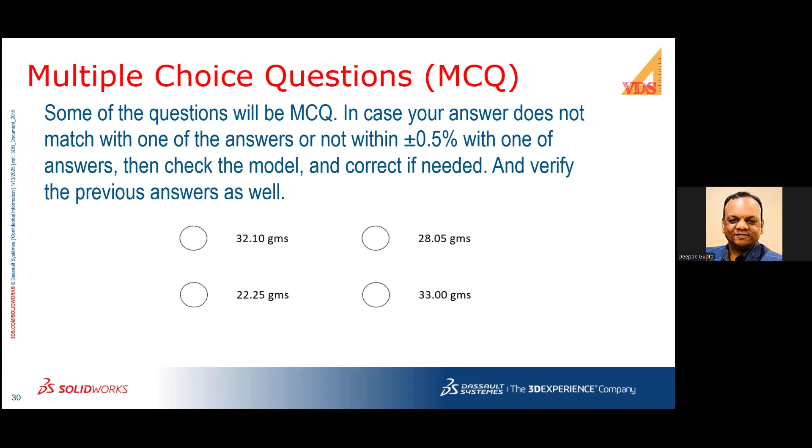Now before the exam, make sure to use these settings. This will help you save a lot of time during the exam and give you peace of mind. Create 2 templates - though most of the questions will be in metric system, I still advise creating 2 different templates, one with the inches or imperial system and second with the millimeter or metric system. Make 2 templates for the model and 2 templates for the assembly. You can assign them any name which makes it easier for you to recognize.

Usually what I do is, if I have to give the exam, I put the exam name followed by the type—part, drawing, or assembly—followed by the unit system. That's how I assign my templates specifically for the exams. On my daily basis, like if I'm working on projects, I assign them by type followed by the unit system. For example, part underscore mm, or part underscore in, or similarly assembly underscore mm, or assembly underscore in.

Set the decimal places for your templates, 3 for inches and 2 for metric. You can also assign global variables in advance, like you can create A, B, C, D different variables for the exam and assign any value to them. This is completely optional, but it will definitely save you some time during the exam.